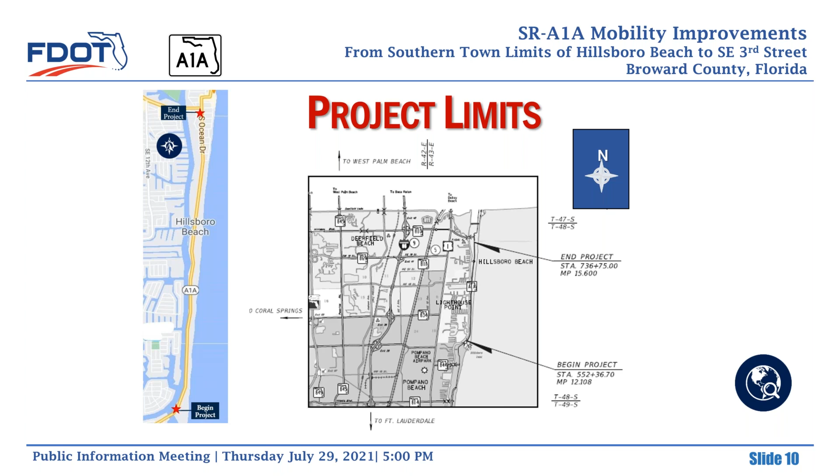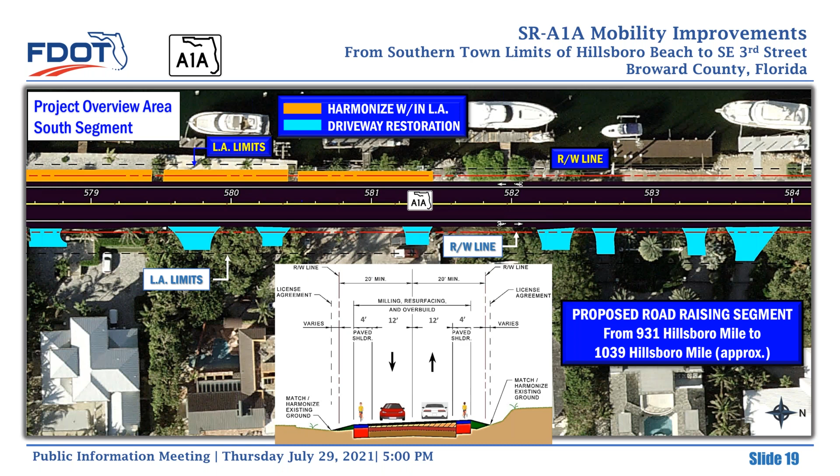Okay, this is an enlarged graphic of the roadway section where we're raising the road. I wanted to point out that we're introducing 12-foot lanes and 4-foot bike lanes for this typical section. And this is from 931 Hillsboro Mile to 1029 Hillsboro Mile. Slide 21, please.

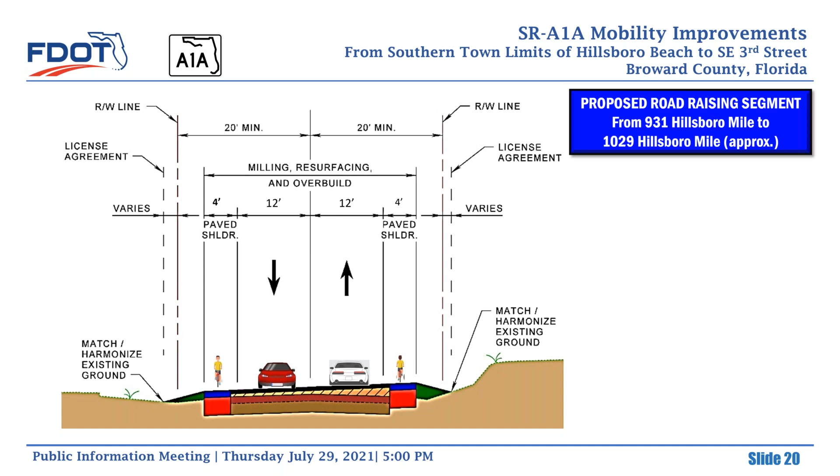This is the segment where we're introducing sidewalk and curb and gutter on the west side. And again, the blue highlighted areas are where we're restoring driveways, and the orange highlight is where we're restoring or blending or harmonizing adjacent land. Slide 22, please. This cross-sectional graphic illustrates the sidewalk portion that we're introducing on the west side, as well as the bike lanes. Because of right-of-way constraints, we can only fit 11-foot travel lanes and 4-foot bike lanes. Slide 23, please.

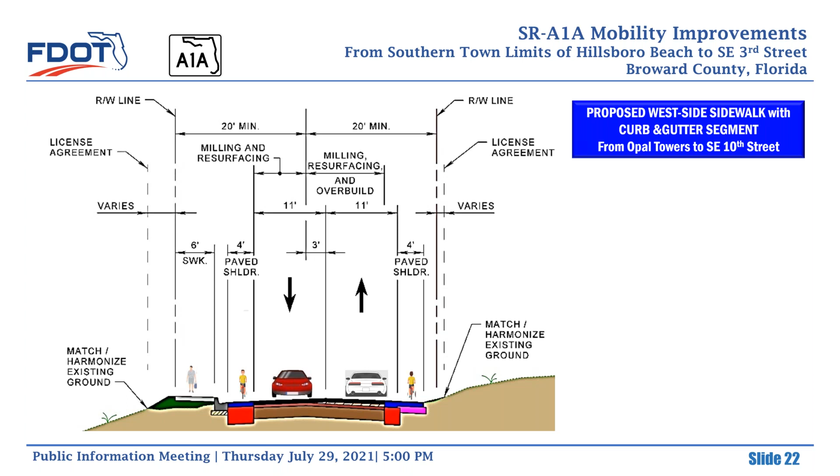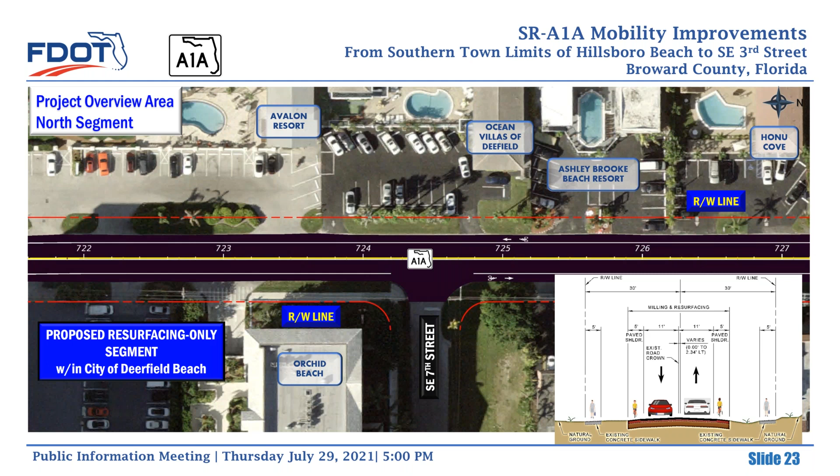As we move forward, we enter the City of Deerfield Beach, and for this particular segment, we're proposing paving only and introducing bike lanes. Slide 24, please. And again, this is an enlarged graphic of the cross section that shows the improvements as paving only. It also shows the 11-foot travel lanes and 5-foot bike lanes. The City of Deerfield Beach requested that we introduce 5-foot paved shoulders for bike usage and narrow the lanes from 12 to 11. Slide 25, please.

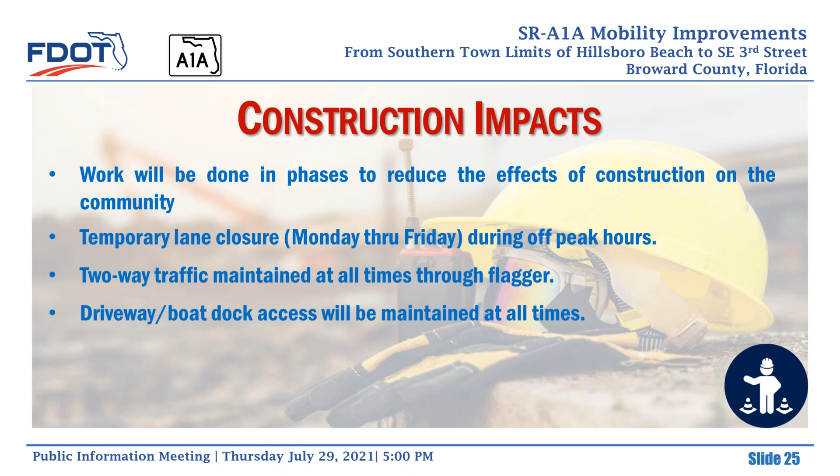The construction will be done in phases to reduce the effects of construction on the community. Temporary single lane closures will be required during off-peak hours. Two-way traffic will be maintained at all times. Flaggers will be present during construction. And the driveway and boat dock access areas will be maintained at all times during construction. Slide 26, please.

Construction is estimated to start in the summer of 2022, and the estimated completion date for the project is fall of 2023. The construction cost estimate is about $6 million. Slide 27, please.

The department encourages safe travels at all times. This is a banner for the month of July. We'd like to share with you this safety banner. Please slow down, stay cool, arrive safe. Safety tips on driving and safe summer travel, hurricane preparedness plans, pedestrian safety, and much more information can be found at the Florida Department of Highway Safety and Motor Vehicles website.

Slide 28, please. Project documents will be available to download from the project website, as stated in the meeting invitation. And the project plans and other documents will also be available.

Slide 29, please. Again, the department invites your comments and questions, so please use one or more comment options shown on the screen. The public comment period will remain open till August 11th, 2021, in order for your comments to be documented in the hybrid public meeting summary report. We would also welcome your comments anytime during the duration of the project. The recording link will also be posted on the project website.

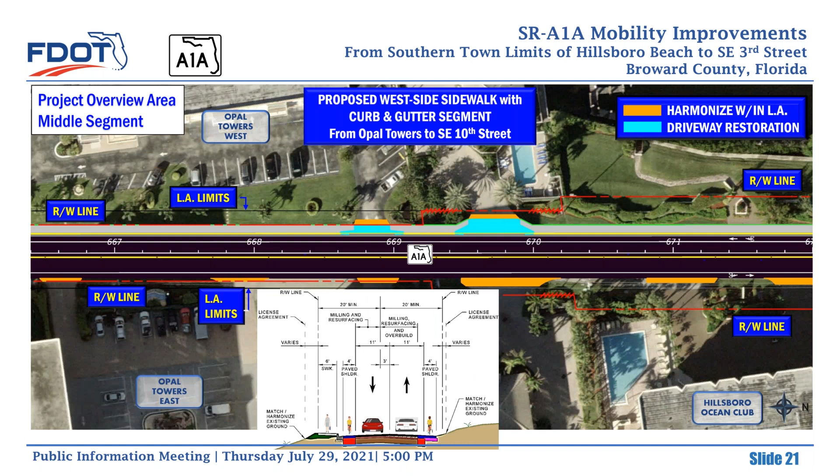But in fact, if I may on that, we have two driveways that go down. We have the egress and ingress. If we have two driveways, we have underground parking on either side. So if you're gonna raise the road, it's gonna impact us when it comes to the flow of water, unless you're gonna install more catch basins or sewers. It appears that if the road is raised, when we have heavy rain, it's gonna flow right into our parking garage.

In fact, you have to see our property first. We have buildings, we have 2 driveways. One to drive into the underground parking and one to come out. So we're going down and then we're coming up. So it could have a negative impact on our garage if you're gonna raise the highway. We're actually raising the road in the southern segment, where the king tide is happening, right adjacent to the Intracoastal. And further north, near the condo complexes, all we're doing is adding a sidewalk and a curb and gutter.

I just want to have it clear, because the people from my condo association watching this or on Zoom are going to say, where's the water going to go when you raise the road where we have 2 driveways that go down? It's a concern, and I think that has to be addressed. Yeah, the water currently is naturally flowing through the driveways towards the Intracoastal, and that drainage pattern will continue. So we're not going to add any extra water. And the road raising in the curb and gutter segment is very minimal compared to the southern segment, so the impacts to drainage there will be minimal, if any.

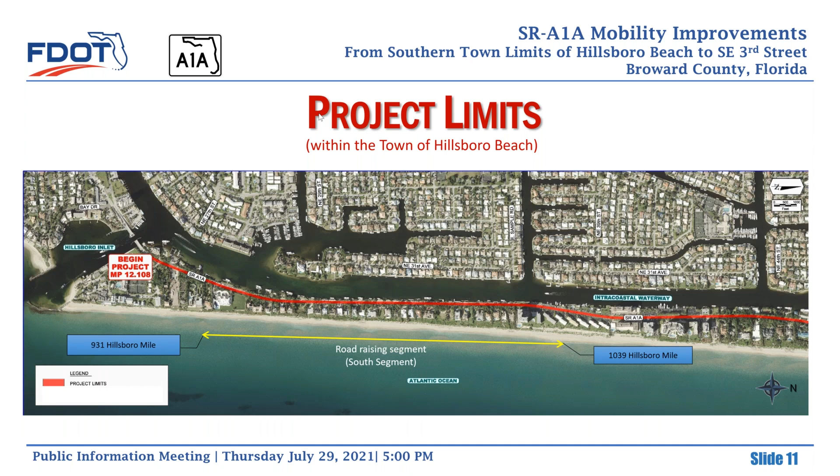Thank you. Roberto, do we have any new hands raised or questions? Yes. We have a couple of questions from the chat, and we also have a couple of raised hands. Let's go to the chat. Question from Ron Johnson: what is the expected project timeline? We are expecting the construction to be between 12 to 15 months duration. That's our current estimate. Also, what is the start date? Start date is summer of 2022.

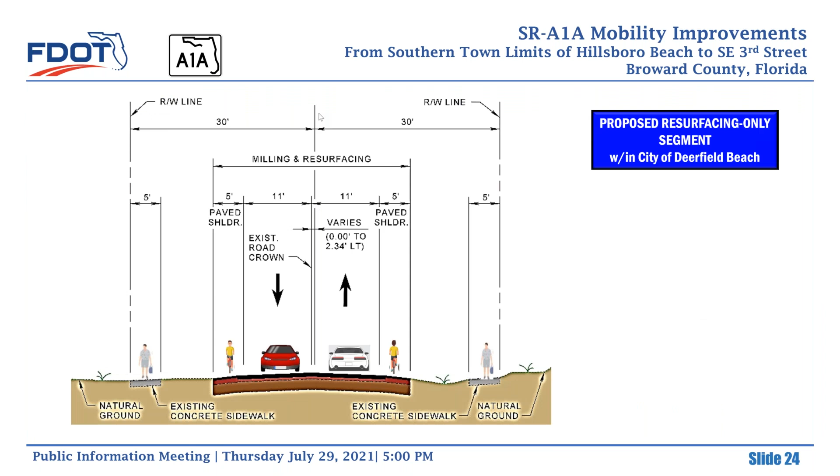Okay, we have from Lisa Jankowski: why no drainage pipe with pump station? This is the same question, basically. And what happens during a hurricane? Well, I guess a hurricane is an extreme condition. It's very similar to king tide, I guess. Water overtopping the seawall. So our design will be such that whatever water overtops from the Intracoastal to A1A will dissipate rather quickly, because now we have a higher road slope in one direction and we won't have any low spots. It's going to be flat, no dips in the road. So water will just simply roll straight back to the Intracoastal.